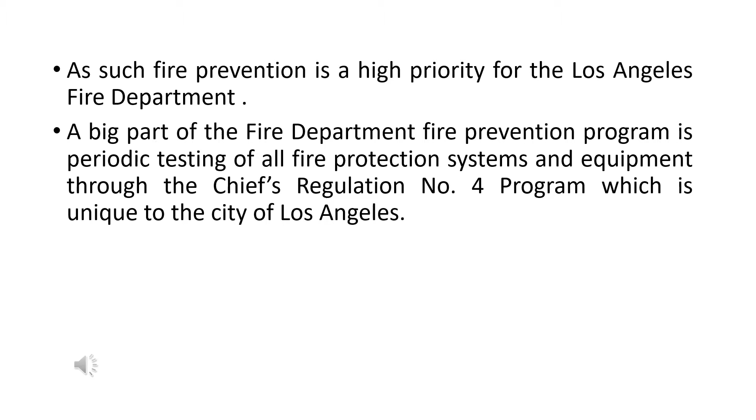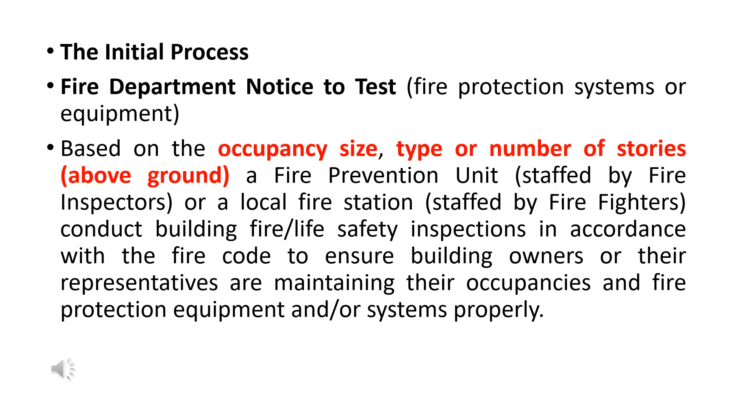The initial process: fire department notice to test fire protection systems or equipment. Based on the occupancy size, type or number of stories above ground, a fire prevention unit staffed by fire inspectors, or a local fire station staffed by firefighters, conduct building fire/life safety inspections in accordance with the fire code to ensure building owners or their representatives are maintaining their occupancies and fire protection equipment and/or systems properly.

The official record of the last successful performance test, also known as a Chiefs Regulation No. 4 or Reg.4 test, is kept on file at each fire station or fire prevention unit. A copy of this report is also required to be retained on site for fire department inspection and review.

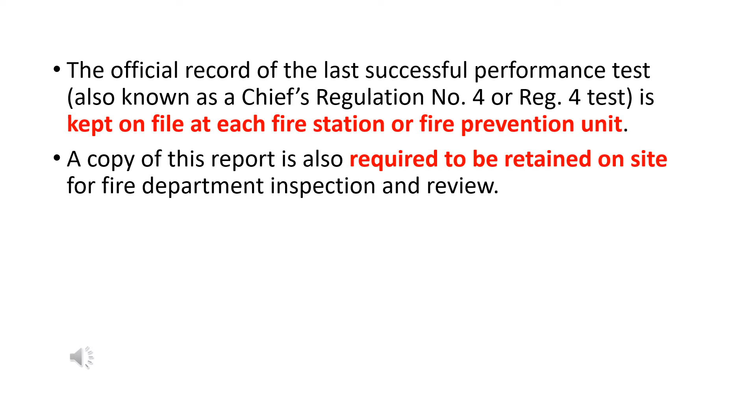The notice of violation will contain the following information: address where the equipment and/or system is located, specific equipment needing a Chiefs Regulation No. 4 test, responsible party (usually the property owner), date of the notice, and the LAFD fire station or fire prevention unit that must be notified of the pending test and receive the test results.

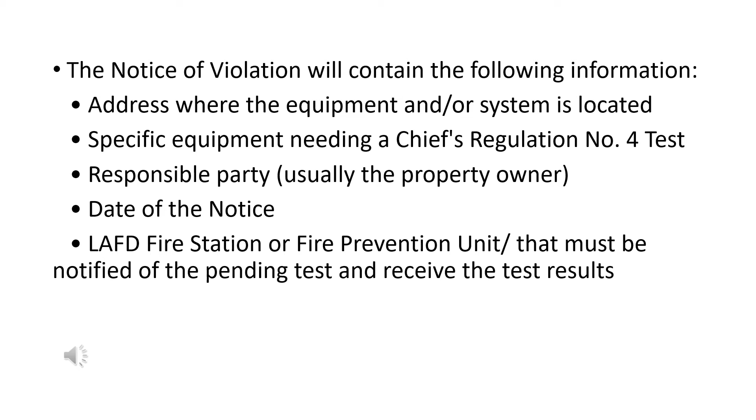Once the owner or responsible party receives a written notice from the fire department to perform a Reg.4 test of the fire protection equipment or system, he or she must arrange to have the test performed by an individual who holds a valid Chiefs Regulation No. 4 certificate of fitness within 30 days.

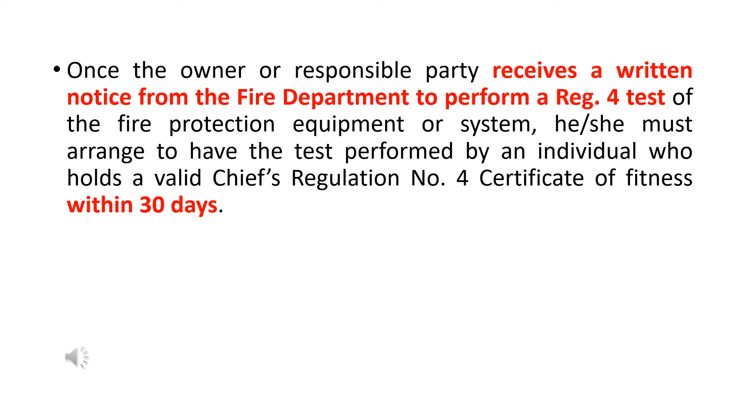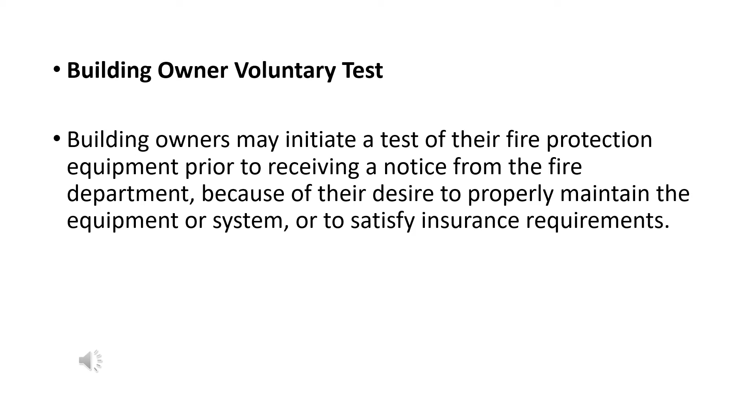Building owner voluntary test: building owners may initiate a test of their fire protection equipment prior to receiving a notice from the fire department, because of their desire to properly maintain the equipment or system, or to satisfy insurance requirements.

Certified testers are required to be certified for each type of system to be tested, and are solely responsible and liable for each test result. Company certification is not part of the Reg.4 program. Only the individual certified tester can hold what is known as a certificate of fitness to test fire protection equipment and systems in the city of Los Angeles.

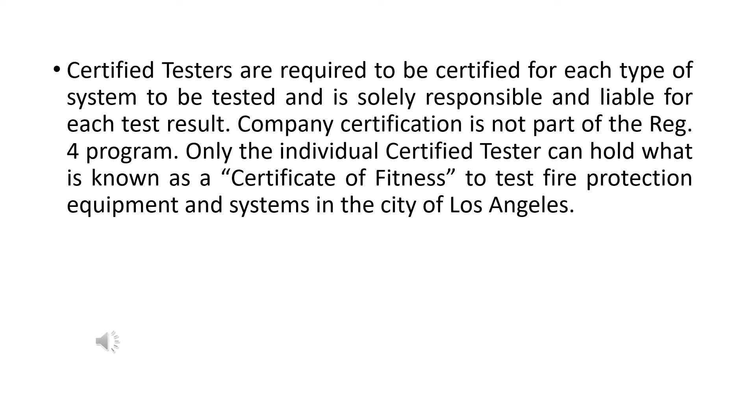Components of the system found to operate below the minimum requirement, or found to be completely inoperable, are indicated as system defects. All system defects are required to be repaired and retested. Note: partial testing of the fire protection equipment or system may be allowed for large or complex buildings, such as hospitals or high-rise buildings, with the permission of the fire inspector responsible for fire code compliance in the building. In all cases, the heart of the system shall be included in the test.

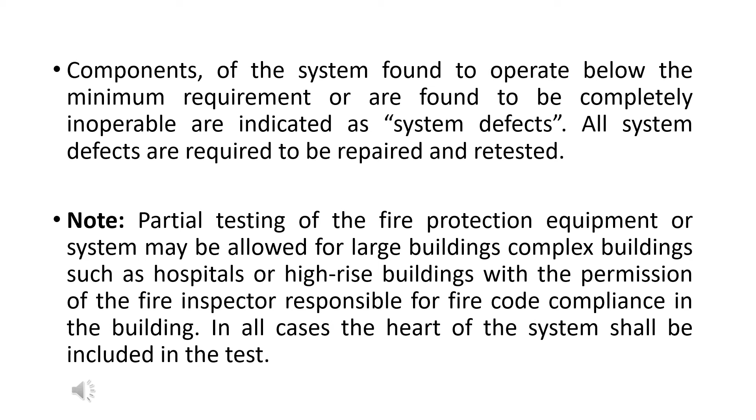Report submittals: the initial F-340R Fire Protection Equipment Performance Report. All Chiefs Regulation No. 4 Fire Protection Performance Reports shall be submitted by the certified tester within 7 days after the completion of any Chiefs Regulation No. 4 test. All test reports shall be sent directly to the fire station or fire prevention unit responsible for fire prevention and record retention, based on occupancy type, occupancy size, or number of stories above ground.

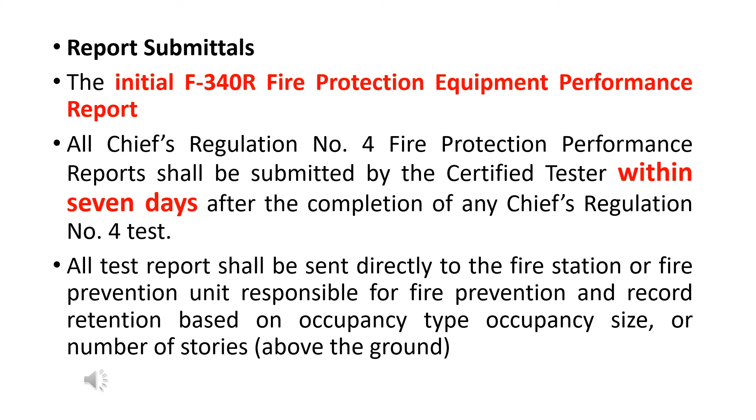All reports are required to be sent via the following methods in the approved format: Fire Prevention Unit General Email Address, Local Fire Station Building Address (unless requested to use a different method by the fire station personnel), or Chiefs Regulation No. 4 General Email Address. Reports sent via email are required to be signed and sent in PDF document format.

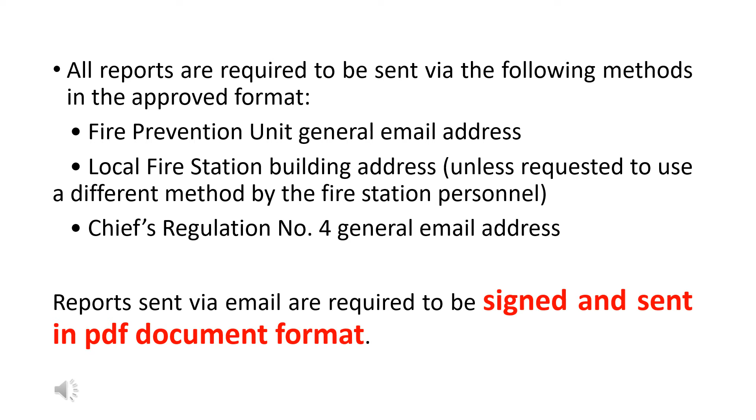The fire department personnel will review the test results for accuracy and determine the status of the system. Where system defects are found in the initial test report, the fire department member shall follow up with the building owner or owner's representative to ensure compliance in a timely manner.

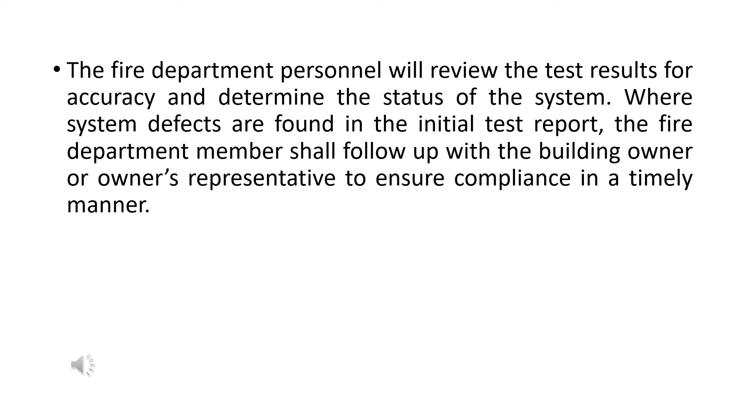Repairs, permits and retest of system defects. Repair of defects: all system defects shall be repaired and retested. The results shall be submitted to the fire department in the same method as the initial test.

All repairs shall be made by a qualified individual who possesses the required certifications and/or contractor license to conduct such repairs in accordance with all state and local codes. The Chiefs Regulation No. 4 program does not include the certification of repair companies.

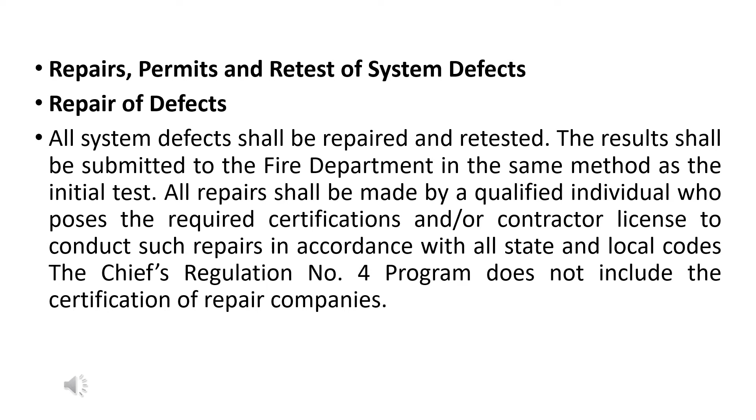Note: most repairs require a permit from the Department of Building and Safety. The most common license is C16 for water-based systems, C10 for fire alarm repairs or electrical repairs/connections. Repair personnel are required to know when permits are required.

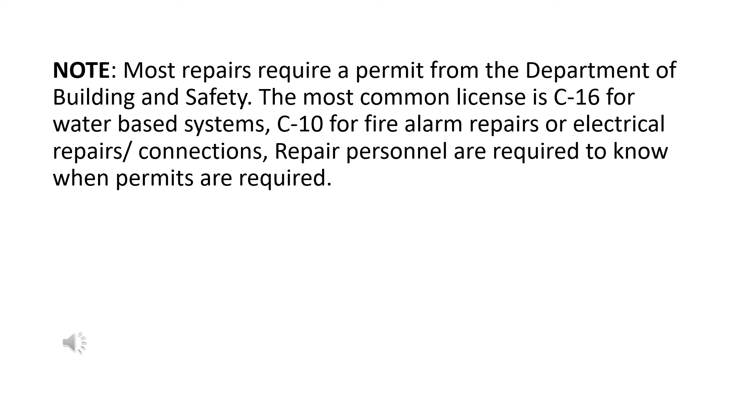Permits for repairs from the appropriate agency shall be obtained and a valid copy given to the building owner and retained on-site for fire department review. Any repairs conducted by an unqualified person, or without a valid permit when required, shall be deemed unapproved upon discovery.

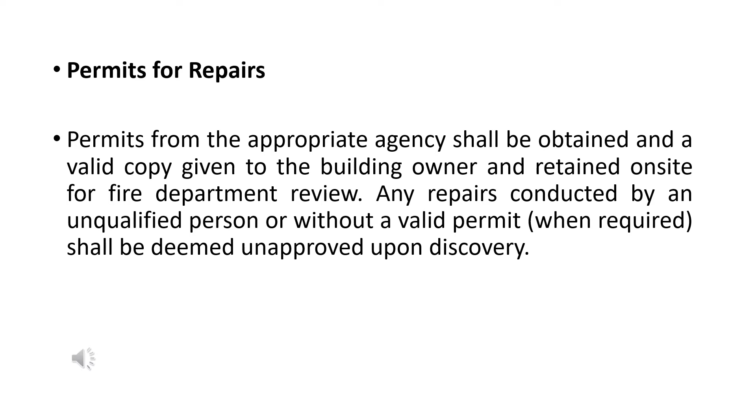Retest of System Defects, partial test. Note: in some cases it may not be possible for repairs and retests to be performed within a 30-day period. The fire department will determine what additional time frame is acceptable. The F-340R Fire Protection Equipment Performance Retest Report Coversheet is required to be attached to a copy of the Section 3 List of Defects from the initial report.

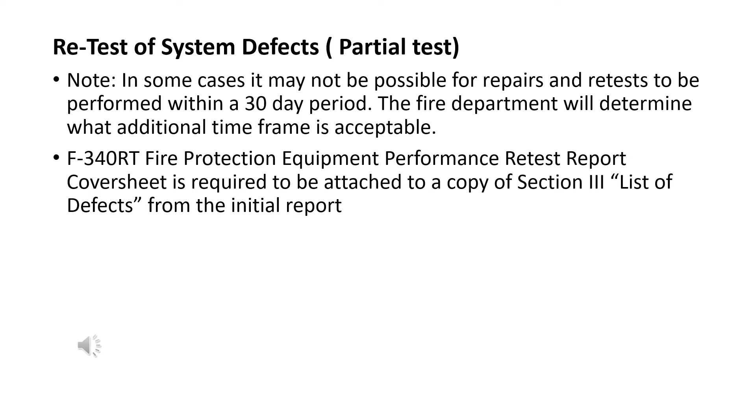All system defects shall be retested by a LAFD certified tester and submitted to the fire department on the F-340RT Fire Protection Equipment Performance Retest Report after all valid repairs have been made. Only the items in the list of defects in Section 3 of the initial F-340R report are required to be retested. The entire system is not required to be retested.

If a new problem is found which is not listed in the list of defects, the certified tester is required to contact the fire station or fire prevention unit responsible for the building's fire prevention and be guided by their instructions.

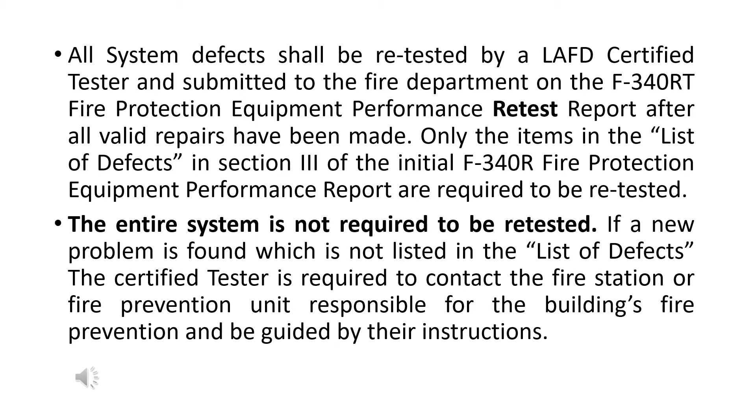New items are not permitted to be added to Section 3 after the initial test has been signed by the initial tester of the system.

Where the retester discovers items in Section 3 that are outside the scope of, or not required by, the Reg. 4 program, the retester shall not perform a retest and shall contact the fire station or fire prevention unit responsible for the building's fire prevention to have the initial report amended.

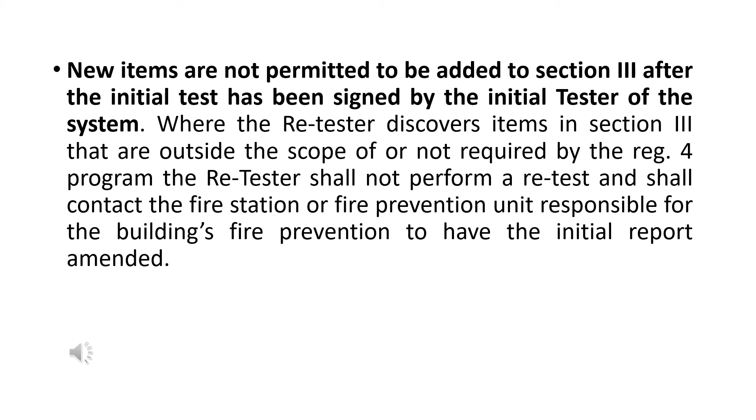Note: all items in Section 3 are required to be repaired prior to report submittal to the fire department. The tester that performed the initial test is not required to perform the retest. Retests may be performed by any certified tester who holds the appropriate certification for the type of system to be tested.

All reports are required to be sent via the following methods in the approved format: Fire Prevention Unit General Email Address, Local Fire Station Building Address, unless requested to use a different format by the fire station personnel, and the Chief's Regulation No. 4 General Email Address.

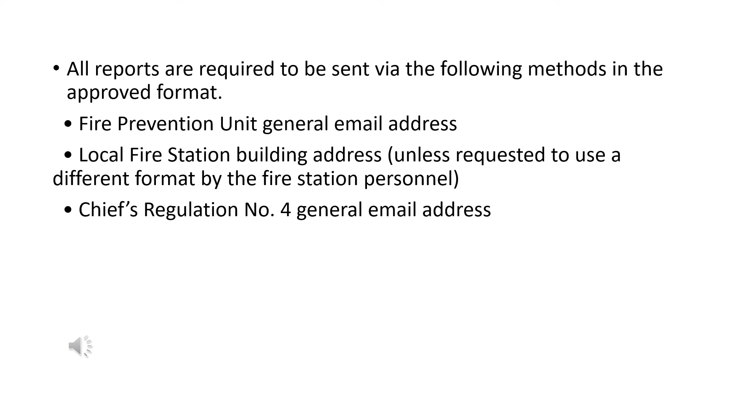Certified Testers: since mid-1987, the fire department has certified applicants to perform Chief's Regulation No. 4 testing under the Certificate of Fitness program. These tests are performance tests. Upon successful completion of the examination process, the applicant is given the title of Certified Tester.

Certified testers must be capable, qualified individuals. These individuals have been examined for competency by the fire department. They must demonstrate their ability to properly test the equipment for which they have a certificate of fitness. They are required to document the results of each test and submit the results to the fire department for review and follow-up. The information is required to clearly show what was tested, how it was tested, and the performance criteria required for each component or segment of the test.

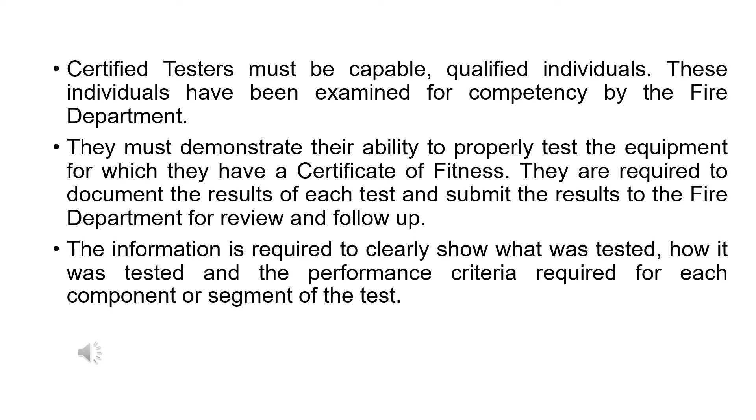Certified testers are not employees of the fire department and are not firefighters or inspectors. They are only given authority to test and submit the results to the fire department. Requiring system upgrades, additional installations, performing fire code inspections, or citing fire code violations is outside the scope of practice of certified testers.

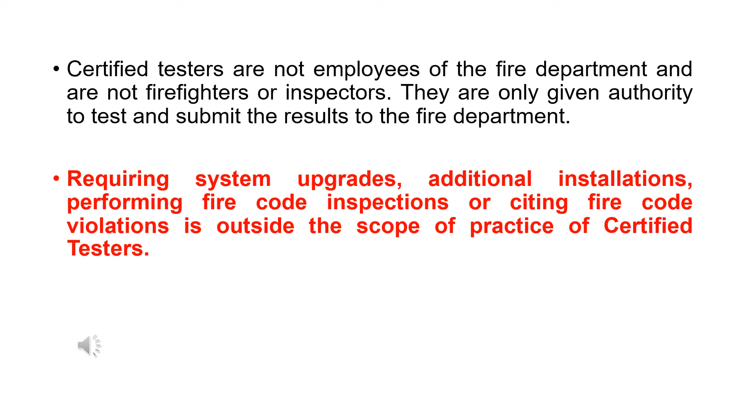The official record of testing is kept at fire department fire stations or fire prevention units. Certified testers do not have the authority to initiate a test based on their company records, or to cause any business owner/operator to make repairs.

Although they have no direct tie to the Los Angeles City Fire Department, they are considered to be representatives of the department. Consequently, they are expected to be honest individuals who will not reflect poorly on the fire department or the Chief's Regulation No. 4 program.

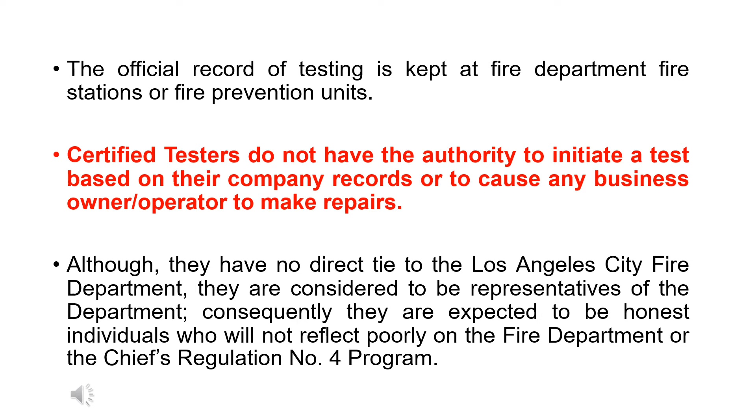Certified testers are to refer to any Reg. 4 testing activities as a test or performance test and shall identify themselves as certified testers, not Reg. 4 inspectors. Certified testers are not given authority to perform inspections of any kind, nor to identify themselves as Reg. 4 inspectors.

Note: the use of the term Chief's Regulation No. 4 inspection is inaccurate, because an inspection is merely a visual observation, which is outside the scope of the Chief's Regulation No. 4 program.

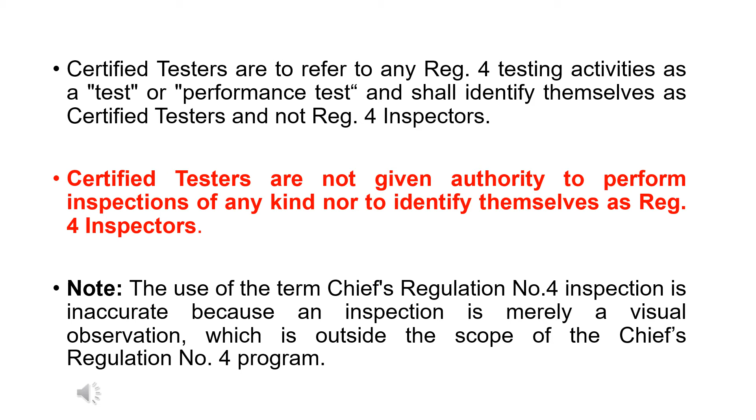Each certified tester must be affiliated with a company qualified and, where required, licensed by the state of California, and must maintain a current business tax registration with the City of Los Angeles. If the certified tester leaves a company prior to the certificate of fitness expiration date, his or her certificate of fitness becomes invalid and the status of the tester becomes inactive until he or she starts a new business or becomes affiliated with a new business that holds a valid and current business tax registration.

Certified testers are allowed to test only the equipment listed on their certification identification card. They are required to have the card in their possession at all times during any testing and must display it if requested.

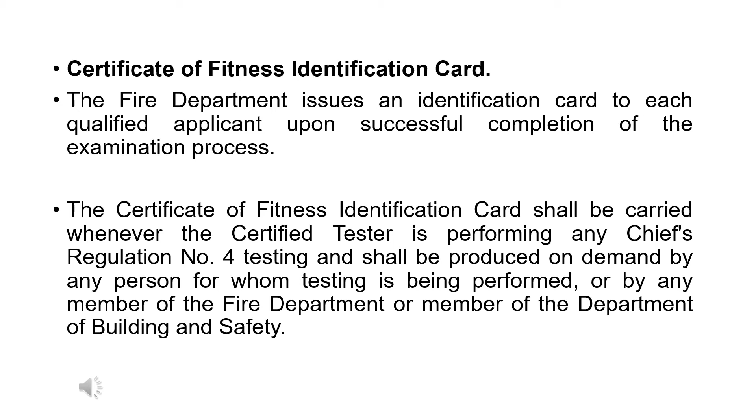Certificate of Fitness Identification Card. The fire department issues an identification card to each qualified applicant upon successful completion of the examination process. The Certificate of Fitness Identification Card shall be carried whenever the certified tester is performing any Chief's Regulation No. 4 testing, and shall be produced on demand by any person for whom testing is being performed, or by any member of the fire department or member of the Department of Building and Safety.

The Certificate of Fitness Identification Card provides the following information about the certified tester: 1. Name of certified tester. 2. Business affiliation of certified tester. 3. Specific system/equipment for which the tester is certified. 4. Approval signature of the Fire Marshal. 5. Signature of certified tester. 6. Certified tester certification number. 7. Expiration date of certificate of fitness. 8. Address of business affiliation of certified tester. 9. One-inch square, color passport type photograph.

The individual designated on the ID card is the owner of the certificate of fitness, and the certificate is only valid for that individual. However, the business affiliation/company of the certified tester shall be indicated on the certificate identification card. The certificate of fitness is valid for a period of 3 years and will expire or can be renewed for an additional 3-year period per system.

Certificate of Fitness Suspension or Revocation. Section 105.5 of the Los Angeles City Fire Code prescribes what action the fire department may pursue when any person violates any rule or regulation adopted by the Board of Fire Commissioners. The law grants the chief the power to revoke, suspend, or deny the granting of any certificate of fitness for any of the following reasons.

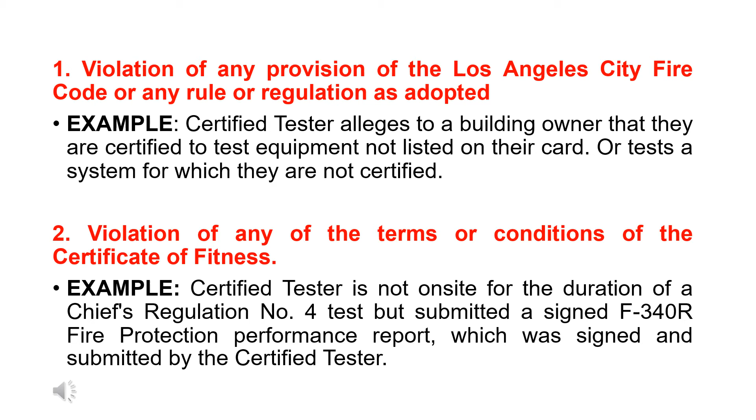3. Example: changing the condition of fire protection equipment or systems in such a manner as to create a greater risk of fire or less protection than was present prior to the testing of such equipment or system. Example: certified tester fails to restore equipment to its normal operating condition after test, or certifies equipment that was not tested.

4. Upon a finding by the chief of any deceptive practice constituting a fraud upon the public. Example: certified tester lists equipment as defective when in fact it is not.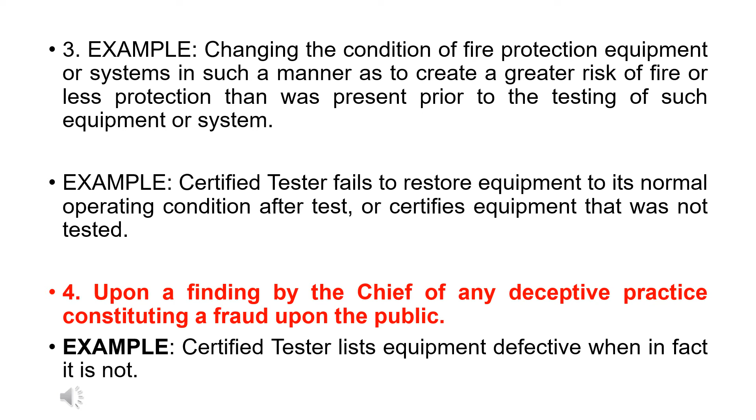5. Upon a finding by the chief of evidence of inability, lack of necessary expertise, or willful or negligent failure to properly and safely perform the duties for which a certificate of fitness is granted. Example: certified tester attempts a test on a complex system for which he has inadequate background and knowledge.

6. Violation of applicable law. Example: certified tester makes repairs on equipment without proper permits, or is not licensed to perform such work.

General qualifications: the certified tester shall have a working knowledge of all Chief's Regulation No. 4 policies and procedures and shall have the proper tools, equipment and competent personnel on site to perform all required test procedures for the fire protection equipment being tested. All tests shall be performed in accordance with an approved system description and sequence of operation, where required.

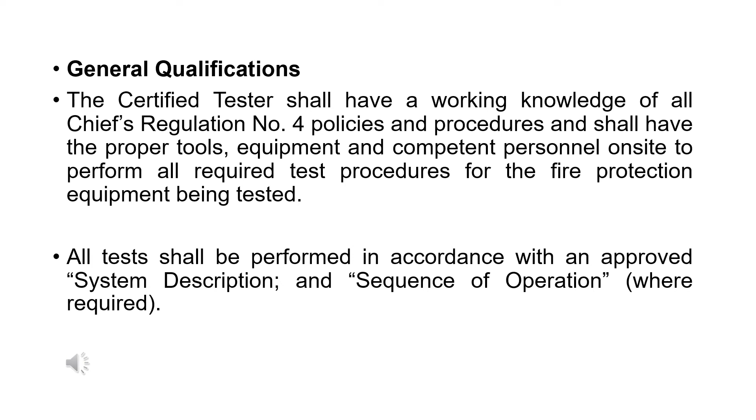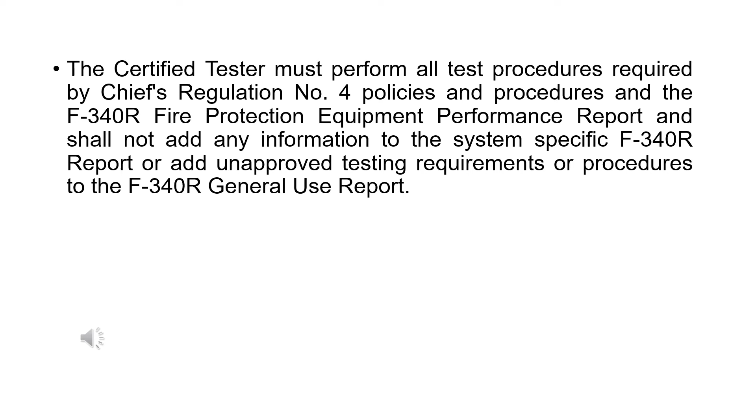The certified tester must perform all test procedures required by Chief's Regulation No. 4 policies and procedures and the F-340R Fire Protection Equipment Performance Report, and shall not add any information to the system-specific F-340R report or add unapproved testing requirements or procedures to the F-340R General Use Report. All assistants shall be verified by the certified tester as competent and shall be required to perform in a competent manner and possess a working knowledge of all testing criteria. The certified tester must remain on site for the duration of the entire test, personally supervise all assistants, and attest to the accuracy of all test results.

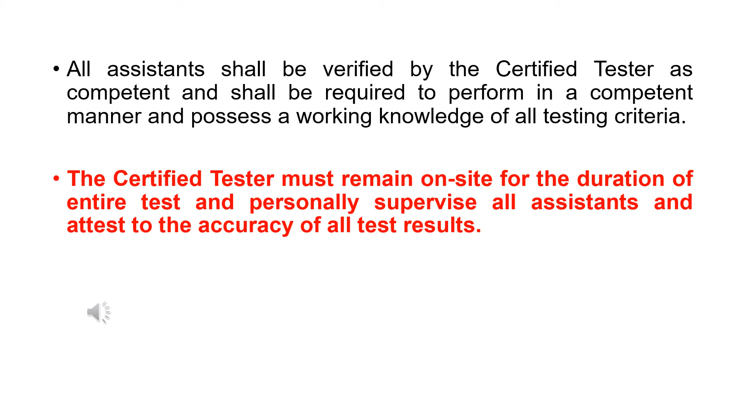Certified tester responsibilities: as part of the Los Angeles City Fire Department Chief's Regulation No. 4 testing program, the certified tester has the sole responsibility for accurate communication and notification to the fire department, regardless of the size of the company for whom the certified tester works, or how the company has assigned staff to assist the certified tester. Certified testers are responsible for complying with all Chief's Regulation No. 4 policies and procedures, and shall ensure all company staff such as company owners, sales personnel, schedulers, dispatchers, testing assistants, etc. have the necessary knowledge and/or documentation to assist Reg. 4 testers with compliance with Reg. 4 policies and procedures.

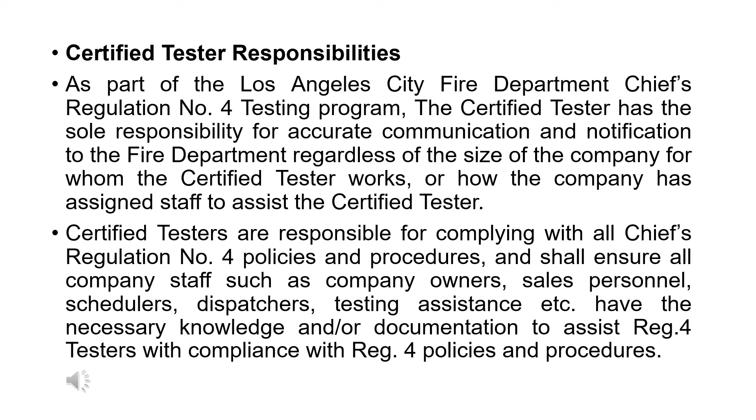Chief's Regulation No. 4 Test, Fire Department Witness. The certified tester is permitted to conduct Chief's Regulation No. 4 testing without the fire department on site to witness the test. However, the fire department may witness any portion or the entire Chief's Regulation No. 4 test. An LAFD fire inspector or fire station member may visit the test site with or without prior notification to the tester to determine that the test is being conducted properly, or because extra procedures may be required, or unusual conditions exist, or for training purposes.

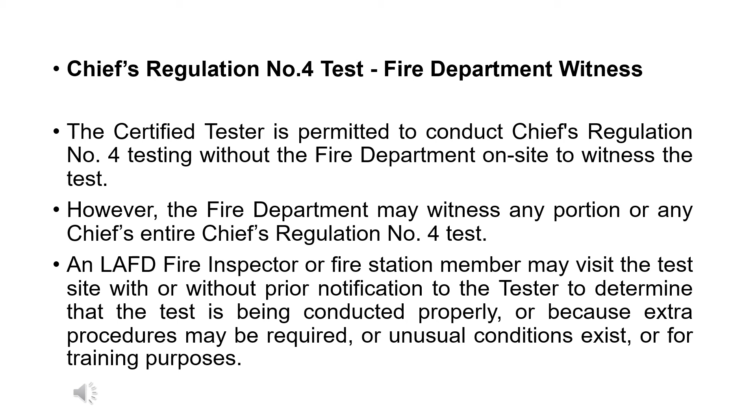In all cases, the certified tester is required to notify the fire station or the fire prevention unit, as well as the Chief's Regulation No. 4 unit, at least 2 full working days prior to any testing. Holidays and weekends are not working days for LAFD, therefore the actual time frame is 4 days. Note: the day of notification and the day of the test are not counted as part of the 2-day notification. Occasionally the 2-day minimum notice is not possible; in such cases the Chief's Regulation No. 4 unit shall be contacted for approval.

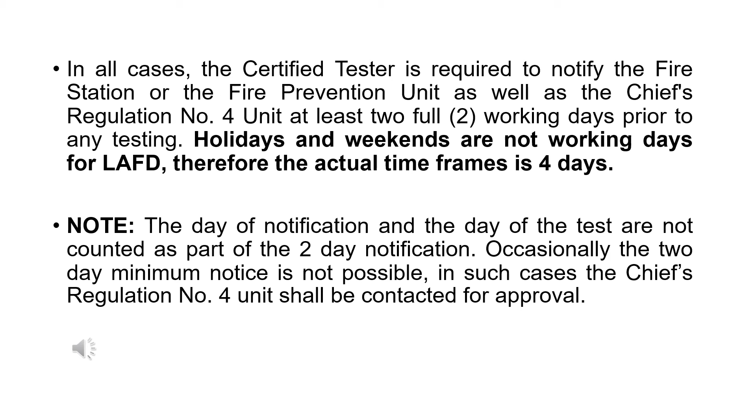Prior to testing: 2 full working days notice, not including the day of notification or the day of the test. Prior to performing any Chief's Regulation No. 4 initial test or retest, the certified tester shall notify: 1. Fire Prevention Unit, staffed by fire inspectors, or local fire station, staffed by firefighters. 2. Chief's Regulation No. 4 Unit. Note: any notification less than the 2 full working day requirement is subject to disapproval and the test will not be accepted as valid.

Depending on the situation, notification in less than 2 full working days may be permitted with prior approval from the Chief's Regulation No. 4 unit. Where more than one tester is hired for one location, or contracted by another Reg. 4 tester to perform a different type of test, each tester is responsible for their own notification.

Day of the test: 1. LAFD Metro Fire Communications Dispatch. 2. Occupants of the building - signage is highly recommended. 3. Supervising Station Monitoring Company.

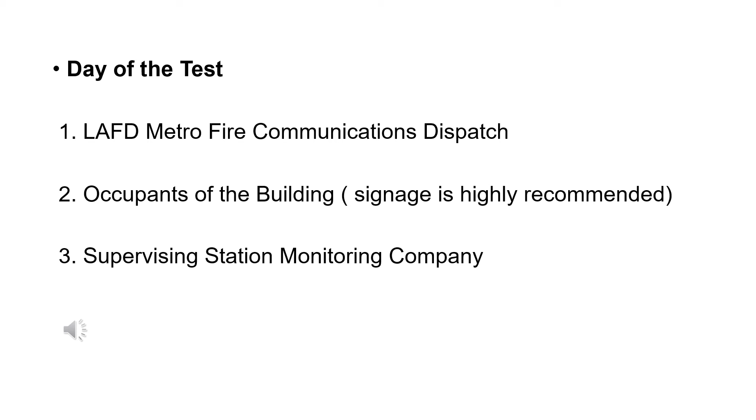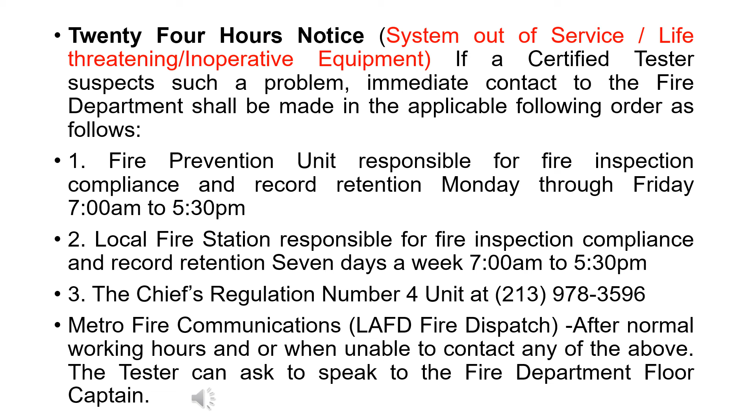Certified testers shall speak directly to a fire department representative. Do not simply leave a voice message. The certified tester shall personally make all notifications or ensure all proper notifications are performed.

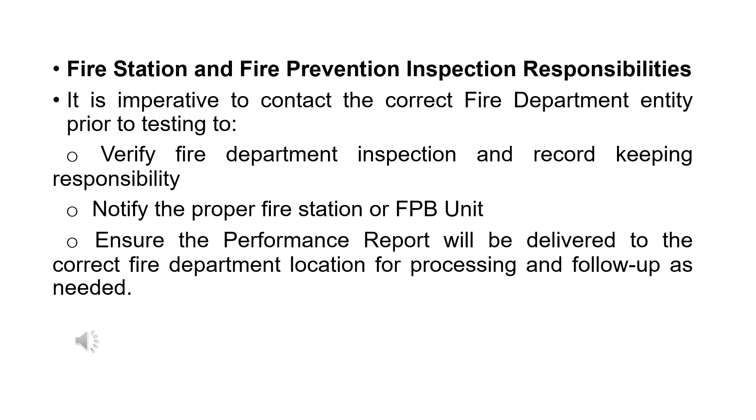Fire station and fire prevention inspection responsibilities. It is imperative to contact the correct fire department entity prior to testing to verify fire department inspection and record-keeping responsibility. Notify the proper fire station or FPB unit. Ensure the performance report will be delivered to the correct fire department location for processing and follow-up as needed.

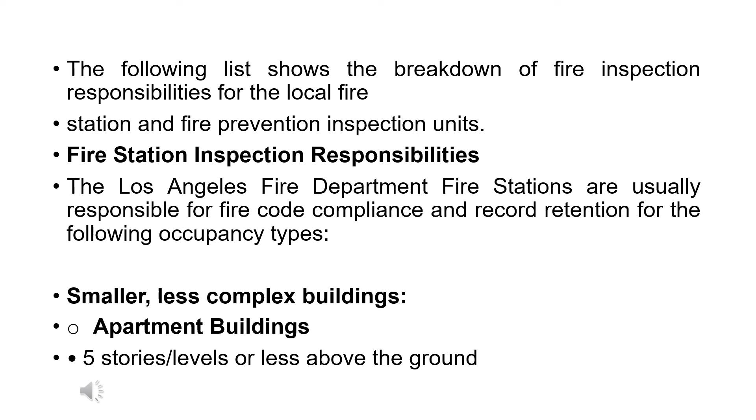Apartment buildings, 5 stories or less above the ground. Industrial warehouses and commercial office buildings, less than 40,000 square feet or less than 4 stories in height above ground level. Small restaurants and public assemblages with an occupancy load of 99 or less. Small schools and churches with an occupant load of less than 750 people, but that do not have a school or daycare on the same property.

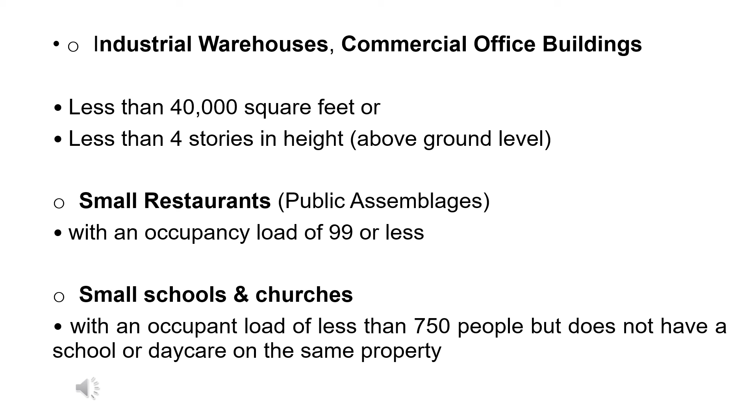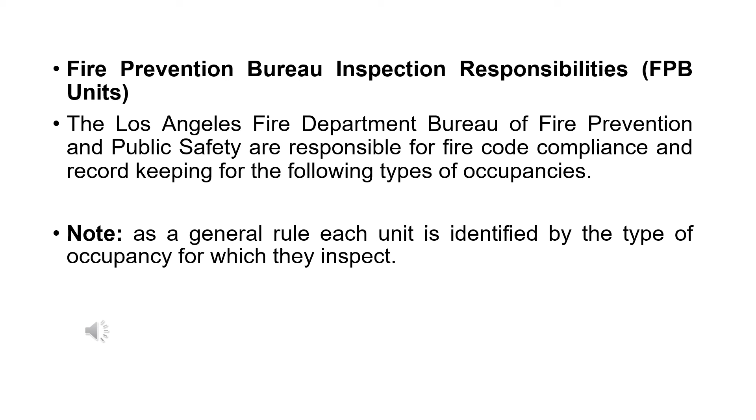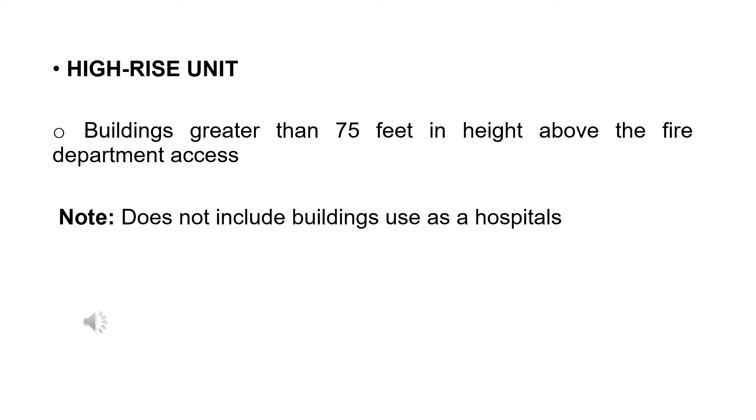High-rise unit: buildings greater than 75 feet in height above the fire department access. Note, does not include buildings used as hospitals. Industrial/commercial units: large commercial offices or warehouses that are 4 or more stories in height above the ground, or 40,000 square feet or more in size.

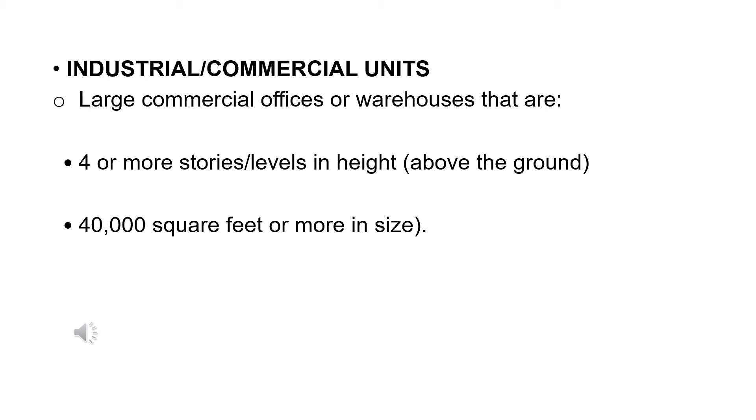Unit locations: Valley Industrial Unit, occupancies located in San Fernando Valley. Central Industrial Unit, occupancies located in Los Angeles metropolitan area. West Industrial Unit, occupancies located in West Los Angeles and Westchester areas. Harbor Industrial Unit, occupancies located in Harbor area.

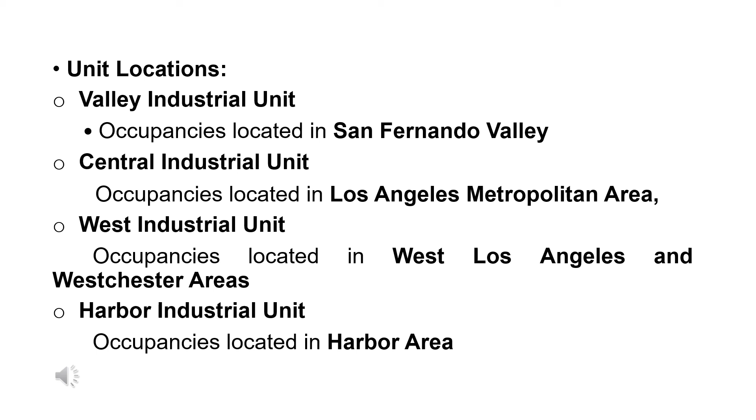Central and West Public Assemblage Unit, located in downtown Los Angeles main office. Occupancies located in Central, West and Harbor areas: hotels, apartment houses and residential buildings 6 stories or more but not high-rise buildings; restaurants with an occupant load of 100 people or more; theaters, stadiums and libraries with an occupant load of 100 people or more.

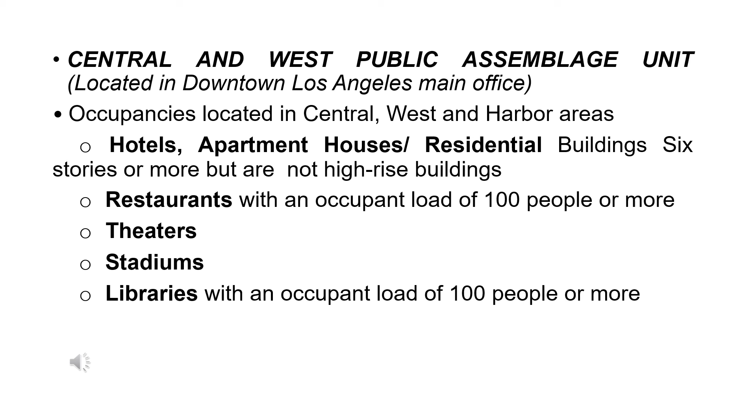Institutions Unit, located in downtown Los Angeles main office. Occupancies located in Central, West and Harbor areas: hospitals, convalescent homes, jails, 24-hour rehabilitation facilities, daycares with more than 6 children, 24-hour mental health facilities, and group homes with more than 6 people.

Fire Prevention Bureau Inspection Responsibilities, FPB Units, continued. Schools and Churches Unit, located in downtown Los Angeles main office. Occupancies located in Central, West and Harbor areas: schools, kindergarten through 12th grade, elementary, middle and high school; churches with an occupant load of 750 or more; and churches with a school or daycare on the same property.

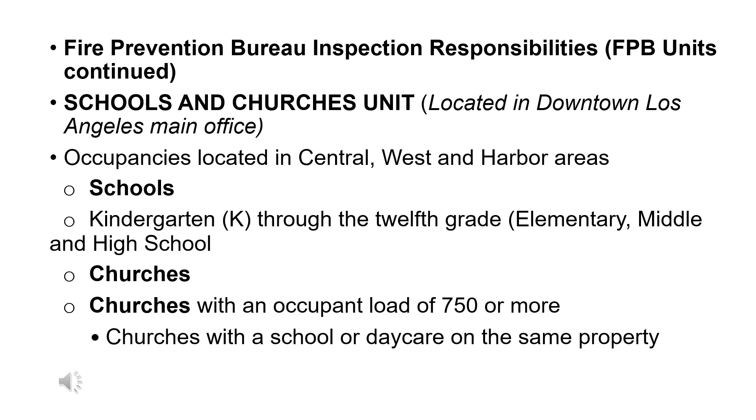Film Unit, located in downtown Los Angeles main office: film studio lots and all occupancies on the lot. Metro Rail Unit: rail stations and facilities on the premises. Legal Liaison Unit: all occupancies with outstanding non-compliance issues.

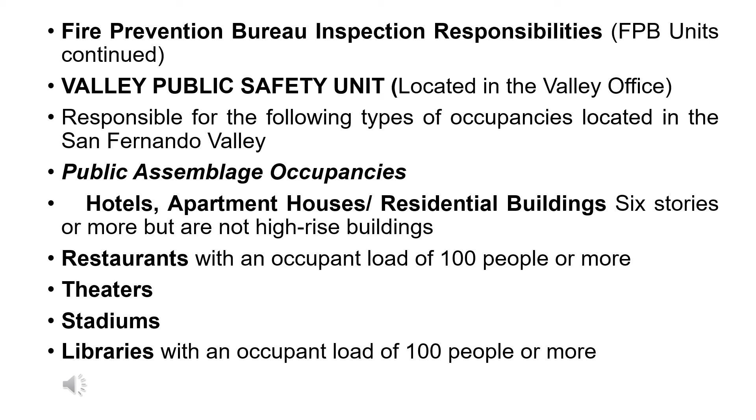Fire Prevention Bureau Inspection Responsibilities, FPB Units, continued. Valley Public Safety Unit, located in the Valley office, responsible for the following types of occupancies located in the San Fernando Valley: public assemblage occupancies, hotels, apartment houses and residential buildings 6 stories or more but not high-rise buildings; restaurants with an occupant load of 100 people or more; theaters, stadiums and libraries with an occupant load of 100 people or more.

Institutional occupancies: hospitals, convalescent homes, jails, 24-hour rehabilitation facilities, daycares with more than 6 children, 24-hour mental health facilities, and group homes with more than 6 people.

Schools and churches: schools, kindergarten through 12th grade, elementary, middle and high school; churches with an occupant load of 750 or more; and all churches with a school or daycare on the same property.

Note: multiple buildings on one property with separate addresses may be inspected by the local fire station personnel and FPB personnel.